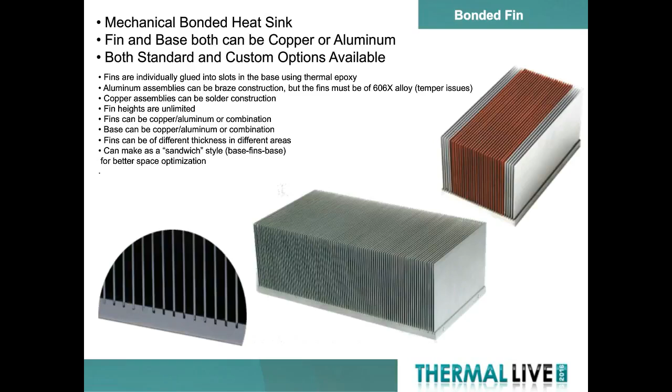So what happens if you run into a situation where you need a solution that is wider than what can be pushed as an extrusion today? In this case, what we do is we try to push customers towards a bonded fin heatsink. We start with an aluminum plate that either is extruded with shallow grooves in it, much easier to push than a full size, or we can do the grooves. The fins are bonded. They're using thermally loaded epoxy, but they can also be done with brazing as well. Brazing would give you the best performance, but there are some drawbacks with regards to those and also your material placement.

One of the other common things that you do with bonded fins is to actually create what we call sandwich-style bonded fins, with a base on the bottom, a base on the top, and a fin stack. Typically, this allows customers to have a smaller footprint because there are devices on both the top and the bottom, and either have natural convection or forced airflow through the middle.

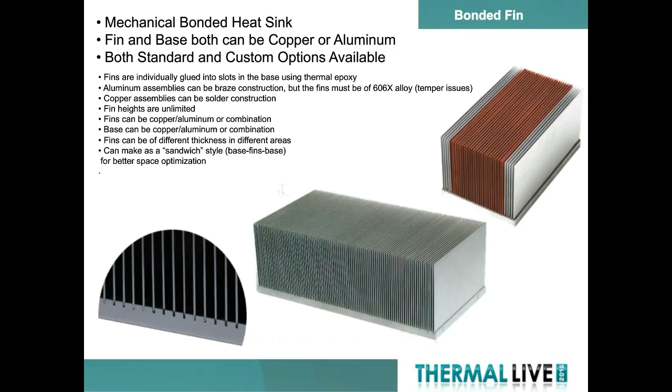Okay, let's carry on. Okay, so slide 2 was just the introductory slide. Slide 3 is where I was talking about thermal extrusion. Let me get back to my slide. Okay, so aluminum extrusions are the most common form of heat sink that's out there. Typically, we use 6063 aluminum, which is easy to push through a die. It has a high thermal conductivity.

In the way an extrusion is made, you start off with a large billet or log of material. It's about the size of a telephone pole. And you push it through a die kind of like an old Play-Doh machine. Your shape comes out the other side. And then there are secondary processes that are done to it before you can actually use the raw material. That includes cutting out the sections where we join the billets together, as well as tempering the material so that it is hard enough for us to machine and drill and tap holes into.

As we look at extrusions, one of the ways that we try to measure the difficulty of whether this extrusion can be made is we look at the overall width, the height, the aspect ratio, and the fin thickness. The aspect ratio is defined as the fin height divided by the fin gap. And what we're trying to look at here is, if we have an extrusion that is a 7-to-1, that's typically extremely easy to do.

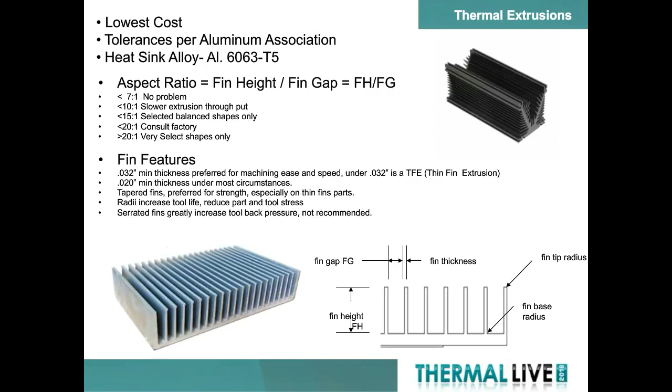So what do I do if I have an extrusion that is too wide or too tall to be produced? We have an alternative technology, which is a bonded fin. We typically start with an extruded or machined aluminum base that has a series of shallow grooves. Into the grooves, we're going to install individual fins. The fins are a stamped out piece. They can be any height, any shape, so long as we have a nice flat edge to be able to join them into the base.

Fins are typically 32 thousandths of an inch or thicker. Thin fins are much harder to deal with, and there are other product styles that lend themselves very well to much thinner fins. In most cases, customers using a bonded fin have a single base and then one set of fins. But we've seen a lot of interest in customers trying to reduce their overall footprint by using what we call a sandwich-style bonded fin, which is a base, a fin set, and then another base on the top of it. This allows customers to put devices on both the top and the bottom and end up with a smaller product than what you could if you had a singular device.

Because the base and the fins are separate pieces, you can actually mix and match metals. So we do aluminum fins and aluminum bases, but we also do copper fins, copper base, mixed with aluminum fins and aluminum bases. A lot of that depends on what is your weight, what is your thermal target. If weight is a huge constraint for you, we've actually done designs that are based on graphite fins, which have a thermal conductivity equal to or better than copper, but at the same time are about as light as aluminum.

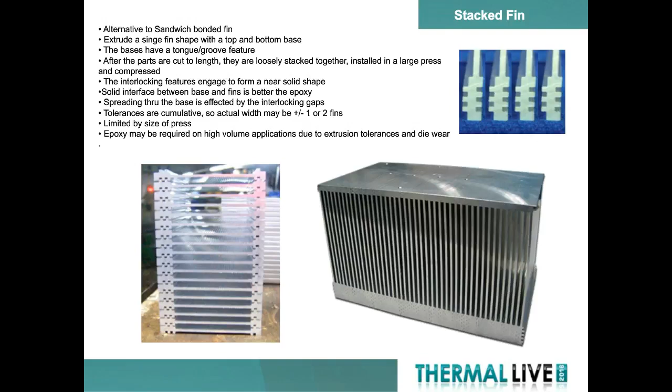But what if I want really thin fins? We see a lot of cases where customers are looking to put multiple heat sinks in a straight line. The thicker fins of a bonded fin, a stacked fin, or an extrusion are just too wide to provide adequate cooling for the last device in the row. So if you had a way of pushing an extrusion with 5 or 10 thousandths thick fins, you could actually have a thermal solution that works for the last device, but that's outside the realm of extrudability.

So what we introduce is a folded fin solution. The fins can be made out of aluminum, copper, stainless steel as common materials. It looks like the interior of a piece of corrugated cardboard. It is a continuous sheet of metal that is stamped and folded into the required shape. Fins generally range from 2 thousandths up to 80 thousandths of an inch. Most customers use 10 to 15 thousandths. So they're getting something that is significantly thinner than what you can extrude.

Just like an extrusion, there is a limit to the aspect ratio on these. As the height of the fins gets taller and taller, the tooling requires the fins to get further and further apart. This can be overcome with some alternatives that I'll show in a couple of minutes. Like a bonded fin, the fins are separate pieces from the base. They need to be attached either with a solder, an epoxy, or a brazing operation.

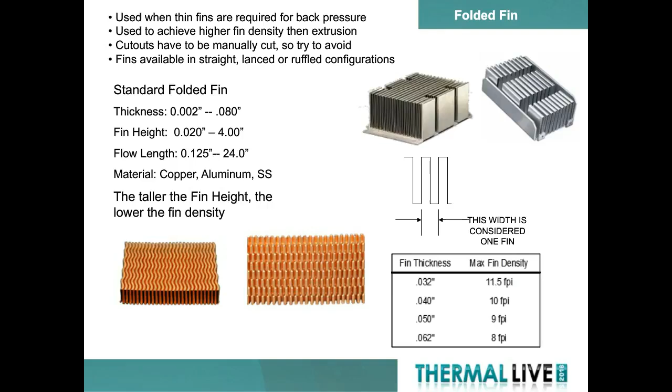Now, in the folded fin, you have thin fins, but you have that bonding agent. A lot of customers get concerned over the fact that they don't want that extra layer of interface between the fins and the base. So if you still need the thin fins and can live with some restrictions in terms of height, one of the solutions that's out there is a skived fin. We start with a block of aluminum or copper. There is a tool that comes across the top of the part, and it raises the fin. It basically slices down into the base and raises up a small burr.

The fins typically are between 0.5 and 0.7 millimeters thick, and you have a height of 50 millimeters, or about 2 inches in height, as a limitation. If you want a taller heat sink, that can be done, but typically the fins end up being closer to 2 or 3 millimeters thick, but you do end up with that solid base at the bottom.

The base thickness for a skived fin, due to the stress that the tool puts on the part, has to be at least 4 millimeters in thickness. We can machine it down afterwards, but if you want to try and avoid secondary operations to make the product as cheap as possible, aiming at a 4 millimeter base will give you the best success.

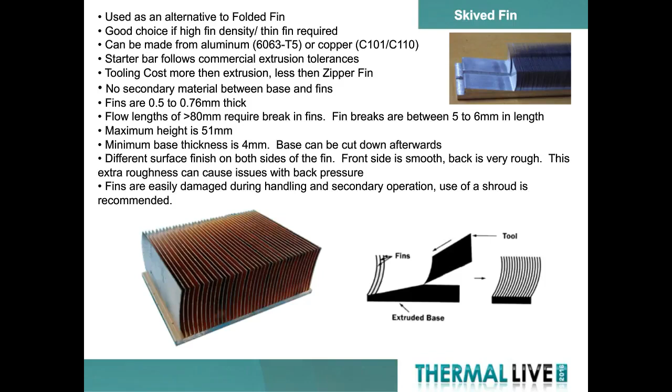But what if I want really thin fins? I want a high aspect ratio extrusion or a high aspect ratio solution, something that exceeds either folded fin or skived fin. In this case, we introduce a zipper fin. Each fin is individually stamped out, typically made out of 10 thousandths thick aluminum and/or copper.

The fins have an interlocking feature that ties the first fin to the second fin. These features are automatically joined together in the tooling so that when you pop this part off of the tool, it is its own fin stack. It is something easy to handle. If you want to mix and match material, or mix and match different lengths or heights, then the zipper features are put in specific locations such that they can be manually joined together in order to provide an overall solution.

The fins can be stamped such that they have open tops or closed tops. A closed top solution is going to capture the airflow, so as it's blown through the heatsink, it's not allowed to escape out the tops of the fins. Thereby, you can have better use out of it or direct it to a secondary heatsink that is downstream in the case of multiple solutions in a row.

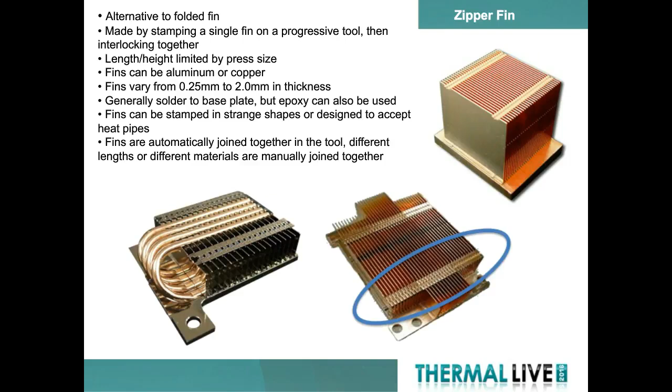So all the solutions I've talked about so far are where you want a high density in order to get your thermal performance. But what if you run into a situation where I want a complex shape that doesn't necessarily need a lot of fins? You may be looking to combine the chassis and the heat sink together. In this case, we recommend a die cast solution.

There are lots of different die casting or casting processes. You can have investment casts, permanent molds, the most common of which is high pressure die casting. Each one of the processes has limitations with regards to minimum feature size or tooling cost, and also the longevity of the tool. Investment castings are great for maybe less than 3,000 or 4,000 pieces, whereas permanent mold can do 50,000 and above, but you wouldn't necessarily want to use it for only 1,000 pieces.

A downside of die casting is that the material is porous because of the way it is formed. This can impact the thermal performance. What we've seen is, based on the alloy that's chosen, you can have thermal conductivities between 80 and 170 W/m·K, compared to an aluminum extrusion at 200 W/m·K.

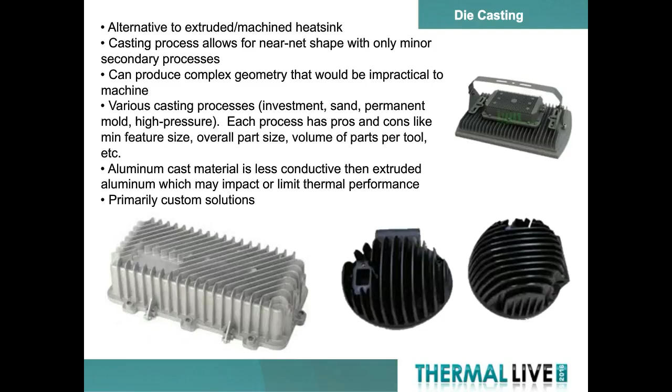So I've mentioned a couple of times in the presentation using heat pipes to enhance the capability of any of these technologies. But what is a heat pipe? So it's a tube with an internal wick structure that has a small amount of fluid. Now, they're called heat pipes, but they actually don't help you get rid of heat. They are simply a transport mechanism. They will pick up the heat from point A, move it to point B, and provided you have met the correct thermal conditions at both A and B, the pipe will continue to work. If you are not able to provide adequate cooling to get to point B, you may not be able to have the internals function.

Inside the part, there is a wick structure with a fluid. It is most commonly water, but you can also use ammonia or alcohol, and that will depend on what your operating conditions need to be. Most consumer applications are going to be able to use a water-based pipe. The water inside the part will boil once it reaches a given temperature. It will travel down the interior of the pipe in vapor space. When it gets to the opposite end where the fins are, or to a colder point on the heatsink, the vapor will condense and turn back into a liquid, and therefore it will be wicked right back to the hot end of the part again, and the process continues to repeat.

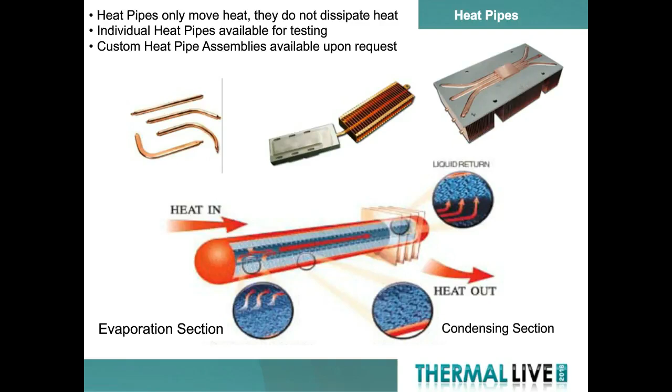But now, what do I do if I can't get there with traditional air cooling? Either your device has extremely high power in a very small area, or you have too large of a heatsink that you're trying to deal with. And this is where most customers transition from air cooling into liquid cooling. Liquid cooling, the examples that are shown on the page here all use tubes, but there are other construction methods, which I'll show in a chart in a moment. Typically, you're going to pump a glycol water through the system, although there are customers that are using both liquid refrigerant as well as two-phase refrigerants to try and achieve higher level performance.

A cold plate requires that you have a pump and then a condensing section. So it is a little bit more technically challenging to deal with than just an air-cooled heatsink, because you have to have knowledge of your pump. You have to make sure that you've picked a radiator and a fan combination that is able to pick up your rejected heat from your cold plate and reject it out into the airstream. If you undersize the radiator, or perhaps you undersize the pump, you may not be able to achieve the necessary thermal balance that you're looking for.

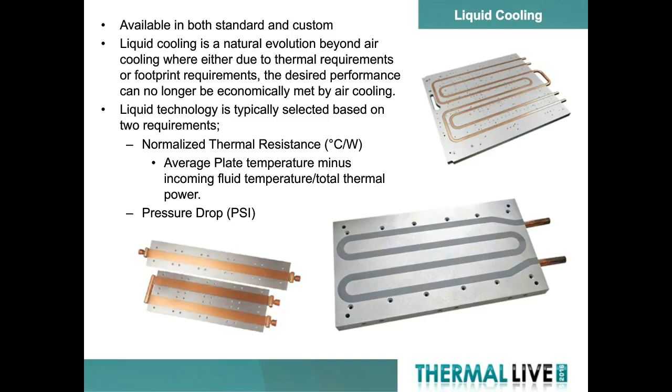Brazed, gasketed, and welded solutions are all examples of having internal flow passages. It allows for a much more complex cold plate. Instead of having a single tube that runs in a pattern on the plate, you can bring the fluid in, you can split it, run it in different directions, you can move it from the top to the bottom of the plate. There's an unlimited number of combinations that you can do, and that can be evaluated by the applications engineer. Brazed and gasketed and welded would be where you could introduce your folded fin, such that you could get higher heat transfer in just localized areas to get rid of the heat from that one problem device that you're trying to deal with.

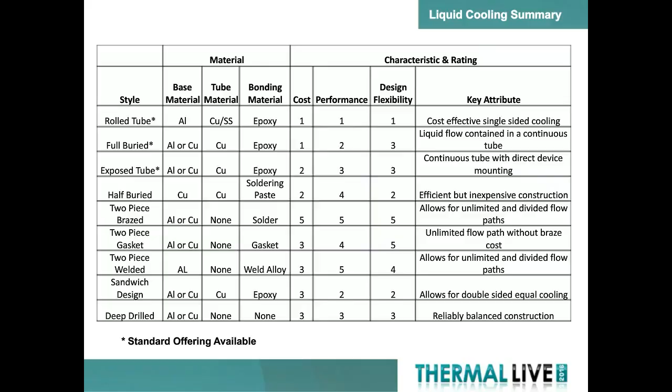So this outlines the various technologies that are out there. There are more advanced solutions. There are ways to combine these solutions. You can have a cold plate with fins on it, where you're taking advantage of both liquid solutions as well as air-cooled. But this is trying to explain the basics to mechanicals who may not know what their next step is, or for the electrical engineer who's been forced into a mechanical role, who has no idea how to deal with the thermal solutions that they're having to come up with.